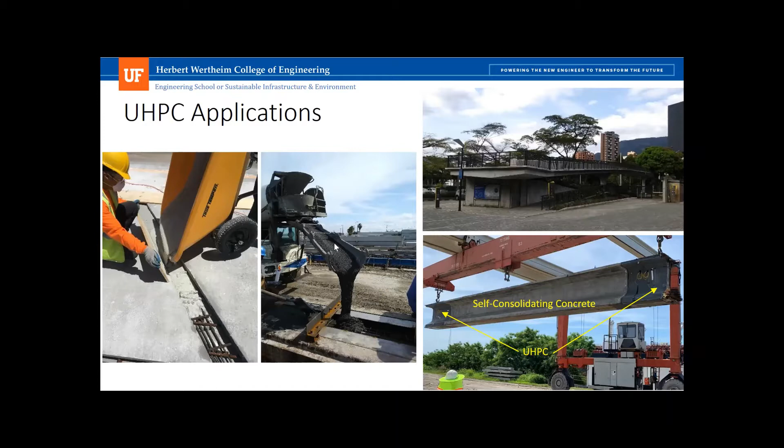So UHPC has a lot of different benefits. You can use it to reduce the amount of steel reinforcement, make your concrete members lighter, and significantly improve the durability of your concrete. This is especially important for environments that have chlorides, like marine environments, bridge decks, or other areas exposed to it. Okay, so we know it has a lot of different benefits and applications.

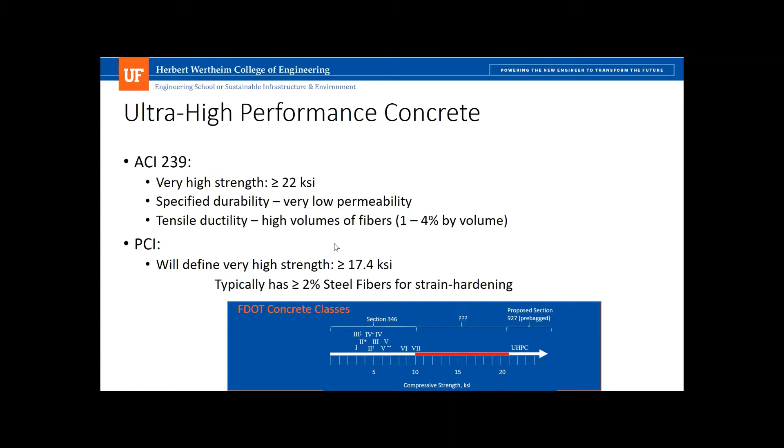You're going to find a different definition for UHPC depending on who you talk to. You'll find some definitions that have it at 150 megapascal, or about 22 KSI compressive strength. Others define it at about 120 megapascal, or about 17.4 KSI. FDOT - right now we're working with the Florida Department of Transportation on looking at where these limits should be. But most of the discussions you hear about compressive strength - how strong can we make it - whereas really the real benefits of UHPC come in the tensile strength and preventing it from cracking, giving you good properties from a structural tensile point of view.

So how do you measure these properties? We're not used to measuring regularly tensile strength for concrete. In most structural designs, we basically ignore it and assume that our reinforcing steel is going to carry the tensile loads. Well, if we're going to take advantage of UHPC and its high tensile properties, we have to be able to measure it properly. So one test that's been developed by the Federal Highway Administration is a direct tension test.

It's based on a 2-inch by 2-inch cross-section sample, 17 inches long, with aluminum plates glued on the side to give it that dog bone sort of effect. And it's pulled with a closed loop displacement controlled machine with an extensometer in the middle. This gives you pretty directly a stress strain curve where you see multi-cracking in good UHPC, and most of the time hopefully you'll see strain hardening behavior and multi-cracking as you see in the pictures in the upper right hand corner where you get these tensile failures.

Okay, so that's one test method. It's expensive. The equipment is not very available currently and definitely not available at most local laboratories.

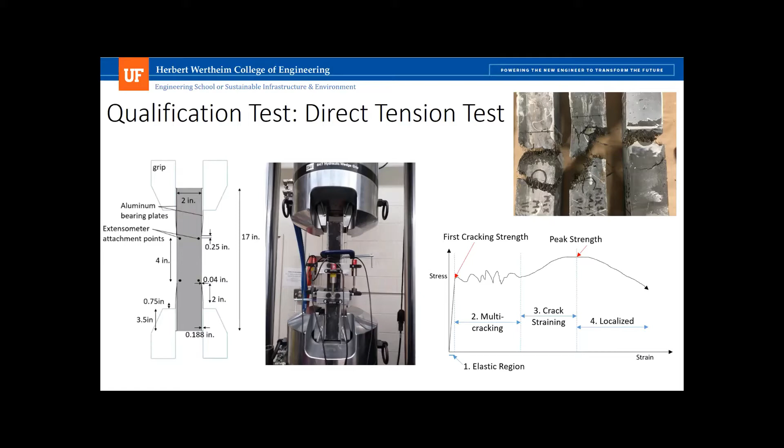Okay, so you get to one of these tests. They work really well for qualifying your material, but both of these require expensive closed loop displacement controlled systems to get good results.

So what do you do for quality control? Many times no tensile testing is done at all. They just rely on the compressive strength testing and rely on the tests that were done during qualification. We assume that it's going to be okay. We assume that the right amount of fibers have been put in, which is a big assumption since at many plants, they're added manually. It's very easy to miss a sack of fibers.

PCI in the design guide that we're working on for UHPC materials is considering requiring 3 beams per day of the flexural testing with an additional 3 beams if you go over 25 cubic yards. This is pretty expensive testing for plants to do on a regular basis. So it's somewhat cost prohibitive to do.

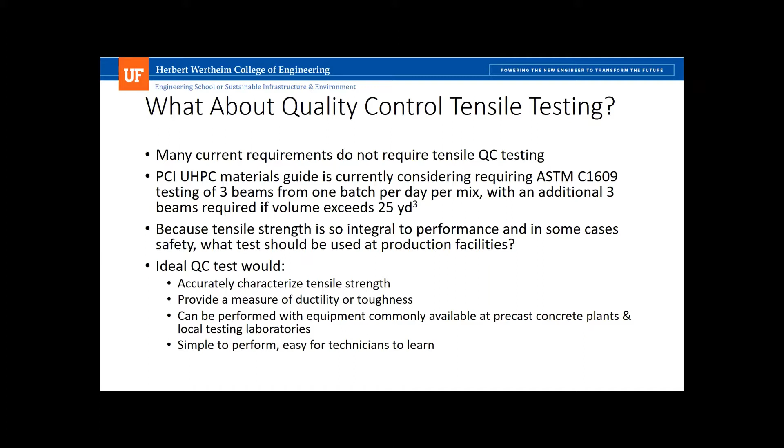Okay, so let's look at a potential test here. It's called the double punch test or Barcelona test. It was originally developed in the 1970s as a test to measure plain concrete tensile properties, but it was adapted recently for ultra high performance concrete or fiber reinforced concrete by a group in Barcelona, Spain.

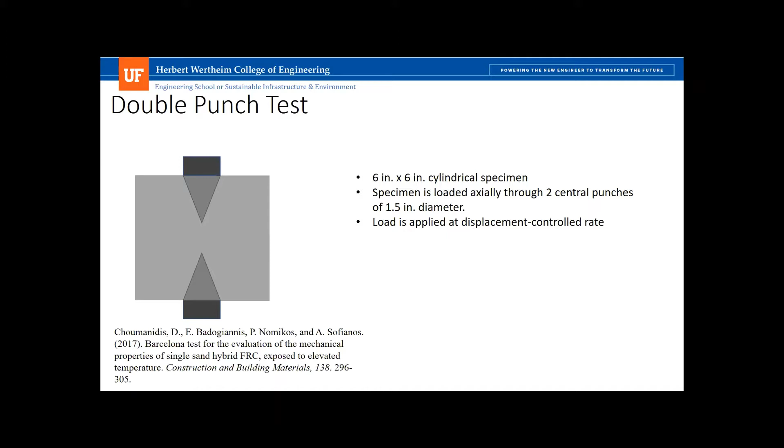In this case, you have a concrete sample where you have two steel punches that you place on top of the sample. When you put it in compression, you get cones of failure that form underneath those punches. As you continue to compress the punches together, they come inwards, and because of the wedging action of those cones, it forces the concrete outwards.

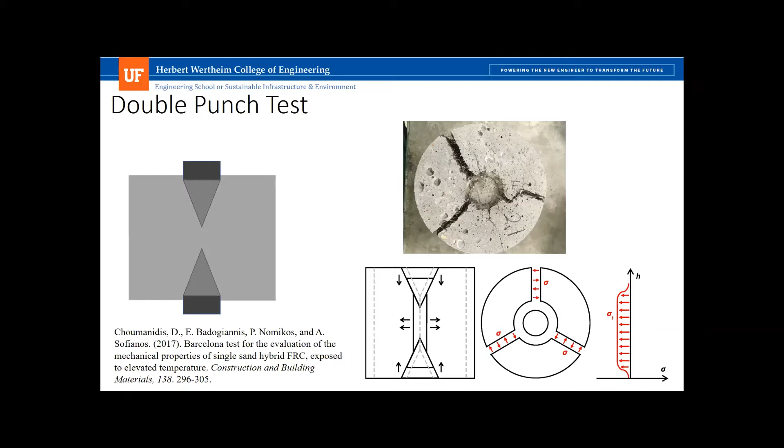When it does this, you get a failure as shown. Since ultra high performance concrete is fiber reinforced, you do get multiple cracks there because you're able to distribute the cracks. That's what you want to see. When you look at diagrams where you try to calculate the stresses, you can get an equation that allows you to calculate the tensile stress based on the load applied to the punches.

Traditionally, the displacement part has been measured using the change in circumference of the sample using an extensometer. It works really well. They have good use and history of use of this in Spain.

There is an ASTM in the works being developed for this test. It's still very complicated. You still need a displacement controlled closed loop machine to do this. The extensometer costs on the order of about $6,000, not to mention the data acquisition to record this. So it's still really out of the realm of capabilities for most precast plants and local testing labs to run. Plus, it's somewhat complicated comparatively because of the data acquisition and logging.

So one of the things that was realized in this testing in Spain was that instead of measuring the circumference, you can get similar information by just measuring the axial displacement of the machine. And so you get a problem in plain concrete, or concrete that's strain softening, where you get basically no displacement measured by the extensometer and the circumference until you get a crack that forms.

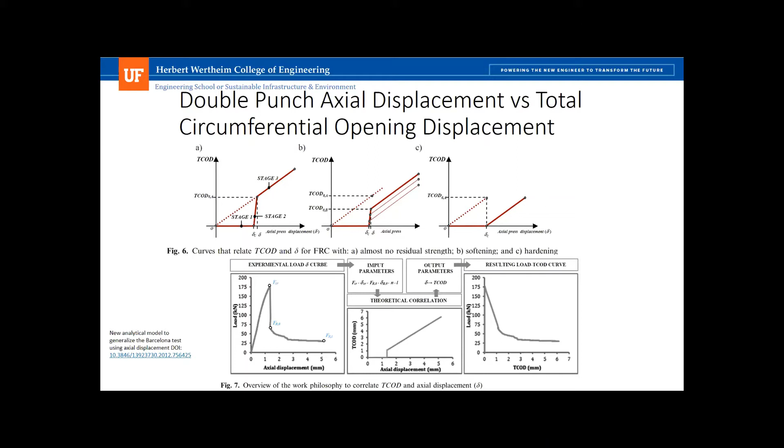Okay, so the next step that we need to overcome is these closed loop machines that are used in the Spanish standard and the draft ASTM standard. So most plants don't have this, they just have a simple compression machine. Now most compression machines are actually displacement controlled machines, they're just not closed loop.

This means that after the peak compressive load, as the load starts to decrease, you get an elastic release of the strains in the walls of the testing machine, which increases the rate of displacement of the sample. Now, this is a big problem if you have a material that cracks and is not ductile. You get a sudden release of energy and a sudden impact loading once a crack forms in non-ductile samples, and this leads to a lot of problems.

The UHPC, however, if it's ductile, you don't get this sudden release of energy and impact loading when you start to get cracking. It gives you a very nice smooth response. At least that's what our hypothesis was.

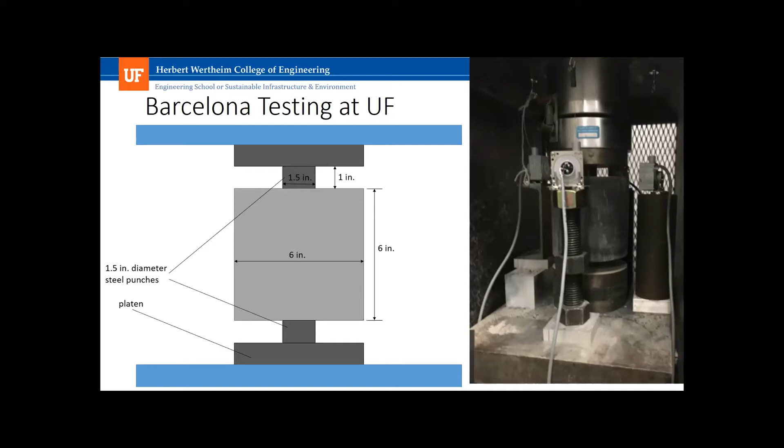So we started testing a program where we used, you can see here, some string potentiometers to measure the axial displacement of our machine and measure the load, and we're able to capture a load axial displacement curve for samples tested in our simple compression machine.

Okay, so we wanted to answer as part of this, can this simplified test be performed in a simple compression machine for QC purposes? Does it work? And is it going to give you reliable results, even though it's not a closed loop?

The next thing we wanted to look at is what are the parameters of the test that you have to control and specify that are going to cause issues. So we wanted to look at finishing process. Do you have to grind these samples flush, or can you just trowel them? That makes a big difference in sample prep for labs. How to cast them, that was an issue we wanted to look at. Punch alignment, if you're off a little bit with the punches, does it make a difference?

And the load rate, especially the load rate, because the load rate on a lot of these machines is a little bit harder to control. You don't get a dialed in exact one millimeter per minute displacement. So we wanted to look at these and then look at how our test results from our simplified double punch test compared to the more complex and expensive direct tension and flexural tests.

Can we use this as a quality control test? Maybe not qualification, that's okay. For qualification, you really have to do that once, and so you can afford to spend more money on that test. But as a quality control everyday test, can it be used?

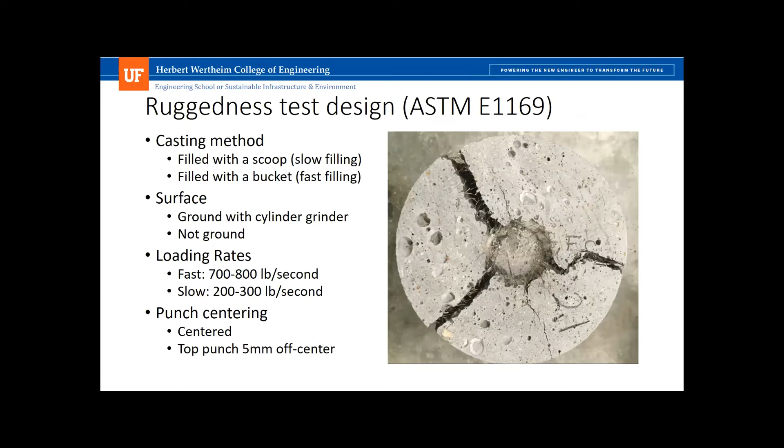So our ruggedness test, we looked at the casting method, filling it with a scoop versus filling it with a bucket very fast. We looked at grinding the samples versus not ground. We did fast versus slow loading rates. You're talking about 2 to 4 times loading rate, and a 5 millimeter off center of your punch. So we controlled all of these variables in a testing matrix specified in ASTM E1169 to see if these factors were statistically significant.

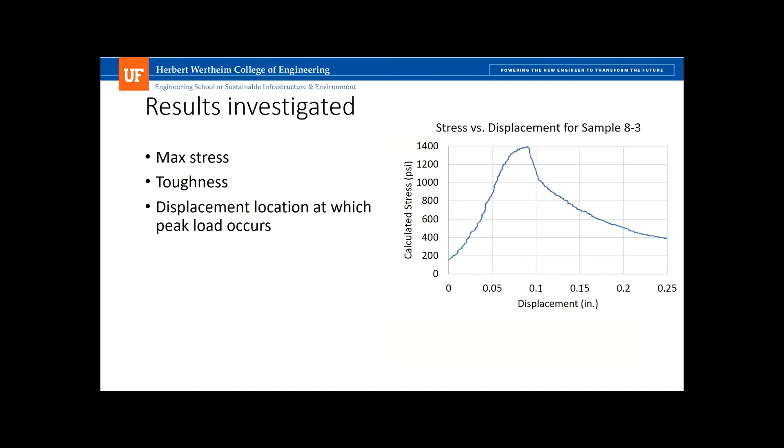And we looked at, with our test, the max stress. We looked at the toughness, or the area under your displacement calculated stress curve, and we looked at the displacement location at which the peak load occurs. So with our ruggedness test, we found that the displacement at peak load was significant if you didn't grind the samples, and that makes sense because you have to locally crush the sample at the surface in order to really dig in and seat the punch.

But it didn't affect the stress or toughness. We found that the scoop versus bucket was very significant. How you make these samples really matters.

If you're filling it with a scoop, you're doing scoop by scoop, basically filling the sample layer by layer. We found that the fibers tend to align in the horizontal direction with thin layers. Each thin layer self-levels out, aligning those fibers in that horizontal direction, and that gives you much higher tensile strength because scooping gives you a preferred orientation, helping to boost your strength. So you need to fill these rather fast, all in one placing from, say, a bucket.

The load rate didn't matter, even that big of a load rate. We see a lot of talk about how the displacement rate needs to be controlled precisely. We found it was not statistically significant in this test, and that's because of the ductility of the sample. A lot of those issues matter less when you have a ductile sample. You're not getting impact loads, and that elastic release isn't affecting as much.

And the centering was not statistically significant either. Centering is actually pretty easy to control. You can use templates to help you get it centered right.

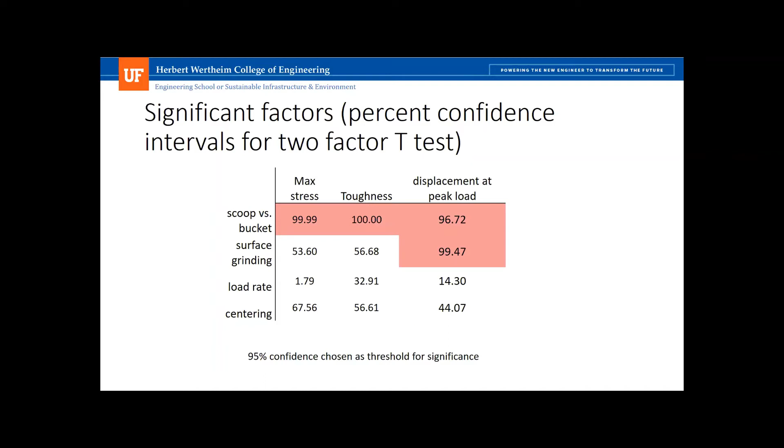Most of these labs don't have the ability to collect string potentiometer data, just like they don't have the ability to collect extensometer data. So numerically, we looked at our continuous data and selected points off of it. Say you take these readings manually - you have a dial gauge that you read off of to read the load and displacement.

If you were to select these points manually and build your curve at that point, say every 0.025 inch of displacement, how does that affect the toughness results you're getting? The peak strength you can get because the machines typically have a method of giving you the peak results independent of you keeping track during the test. So that's not a problem.

But the area, we were concerned that would matter if you simplified it further. We found that as long as you're taking results about every 0.025 inches, it only made a deviation of 1.5% from taking continuous measurements. Very little difference, and it gives us confidence that you can take these results manually, writing them down.

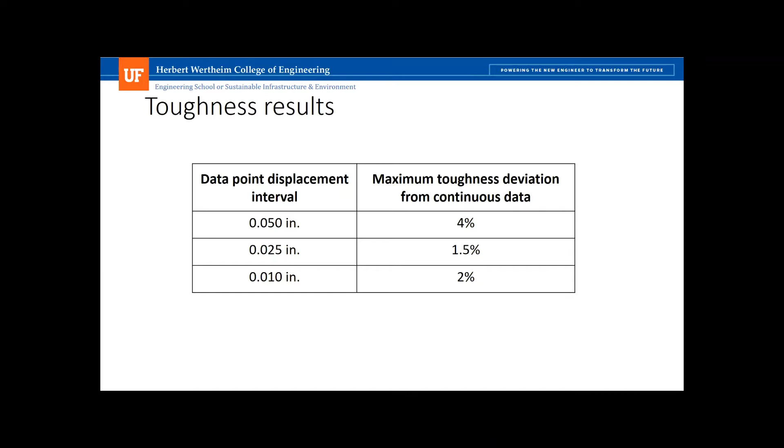In fact, we've taught undergraduates in our laboratory how to take these. It's similar to how elastic modulus tests are performed manually - you write down the load and the strain value in the compressometer when it's written. Well, in this case, you write the load down.

For us, this means you have your punches, you write the load down, and then you have a displacement gauge. You can buy these pretty cheap at the hardware store - at most, even a fancy one's a couple hundred dollars. So plants can run this in their compression machine without any real issues.

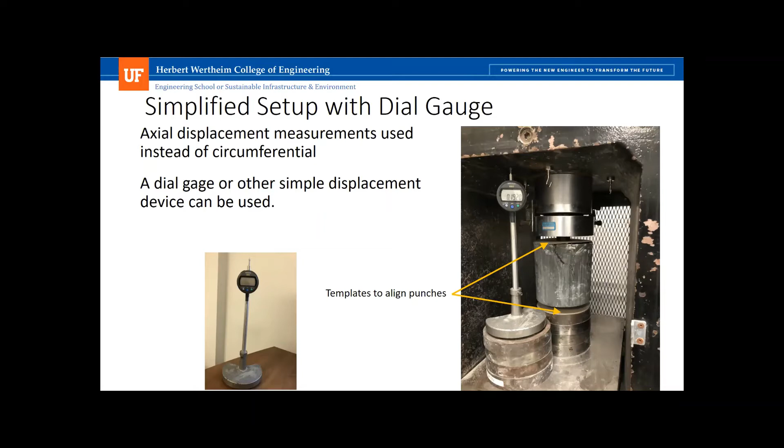So we looked at different fiber percentages for ultra high performance concrete to see how they affected the results in this double punch test. We found that with two different types of fibers, you get very different results if you just look at the stress, basically the strength or maximum strength of your material.

Part of this is because you can get a very high failure strength just from the first cracking load, basically the strength of your cementitious paste system, even without the fibers. You can get a very high load, but then it cracks and you get no residual strength after that. That's why you really need a measure of toughness or ductility.

So with our fibers that were not giving us a ductile response, the double punch test was able to nicely pick that up, and it picked up the toughness with our straight fibers pretty well.

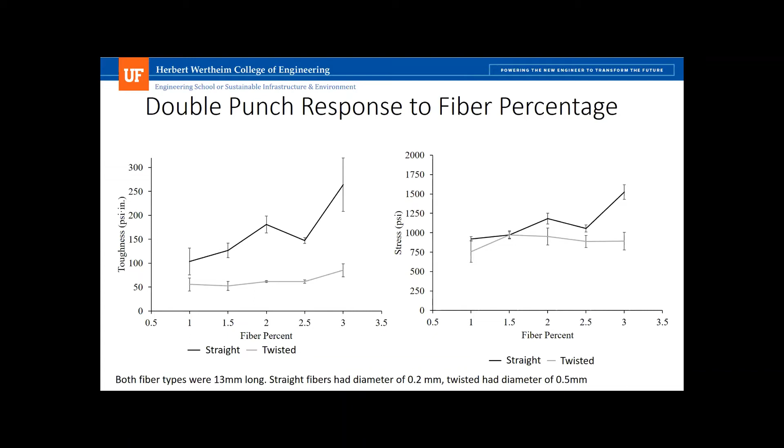So if we compare the results of our double punch test to our direct tension results and our flexural test to see how it performs, we find very nice correlations between the direct tensile strength in double punch and our direct tensile results. We get the same with our direct tension versus our flexural - you get nice correlations no matter which test method you use.

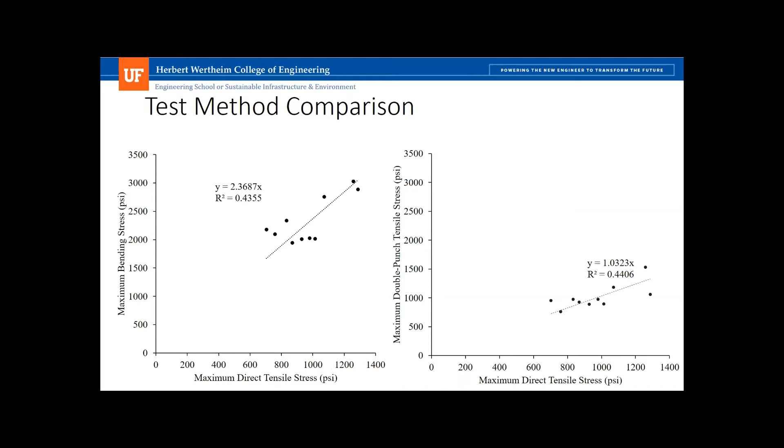You just have to be careful that with the flexural test, you're really getting a modulus of rupture, not a true tensile strength, just using that simple equation.

So something to be aware of: we find that when we compare the flexural modulus of rupture with the double punch test tensile strength, you get very nice correlations. Again, you just have to be aware of that increase because of the flexural modulus of rupture.

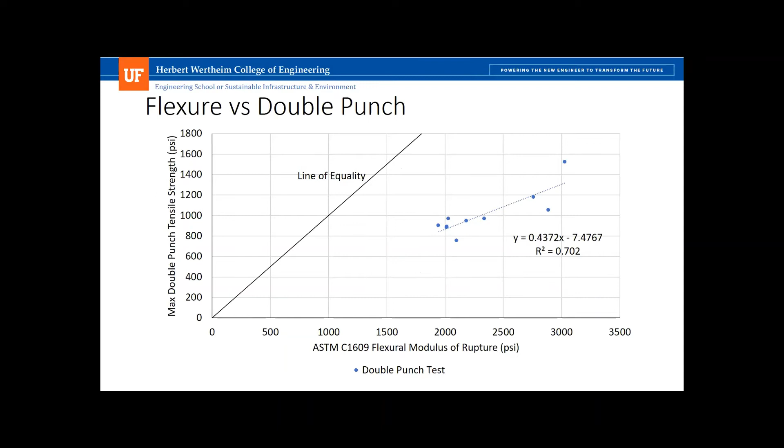When we look at direct tension ductility parameters, comparing the tensile stress at 0.05 strain or the direct tensile toughness, we again get excellent correlations. These are on the same order of R-squared values as when you compare direct tension toughness to the flexural toughness result. Very good, nice results.

So if we look at a summary of our tests, the first thing we can say is you really have to have a measure of toughness and ductility for UHPC for it to be valuable. Otherwise, you're just measuring the first cracking load a lot of times, or you could get it accidentally.

So for our ideal QC test, looking at our parameters, we find that we can accurately characterize the tensile strength with our materials. We've got very nice correlations with the direct tension strength, and it gave us a very nice correlation with more expensive measures of ductility and toughness. You can do it with commonly available equipment at precast plants, and it's pretty easy — we're having undergraduates perform it at our lab.

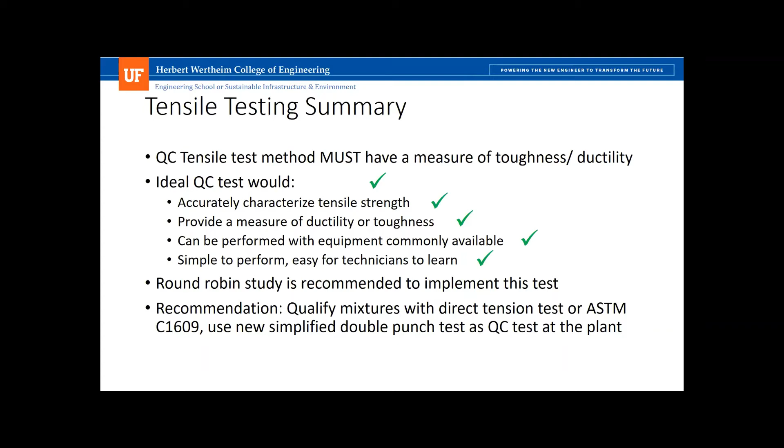We would recommend that a round robin study be done, just to get the precision and bias. But we feel that this test method could be used as a quality control test at the plant. With that, I'd like to acknowledge FDOT for their support, advice, and help.

With that, I'll take any questions that you have.

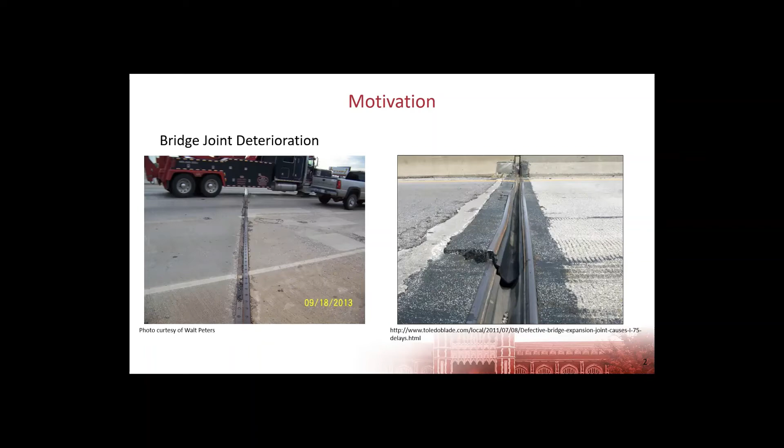Not only is fixing those joints necessary, but as they're damaged, they're letting chloride-permeated water go onto our girder ends within the bridge, and it's causing a lot of damage and corrosion within our precast girder end regions, where we have our major location of pre-stress transfer and high shear forces. We've seen in testing of full-size girders with this type of corrosion damage that we can even get deterioration of the bearing regions under service load levels. So this can cause some serious issues in terms of the life of our bridges over time.

So there are a lot of ways we could eliminate these problems. One is to reduce the number of deck joints to begin with. In a number of bridges in Oklahoma, this was done by creating continuous spans between precast members with individual continuity connection blocks. The ends of the girders would be connected using extended pre-stressing strands from the end of each girder, some mild steel rebar in some cases, and then a concrete block cast to connect the ends of those two girders, making them continuous for live load.

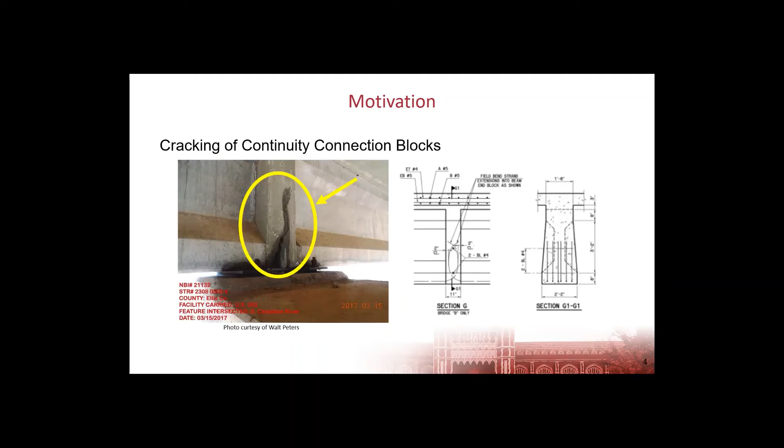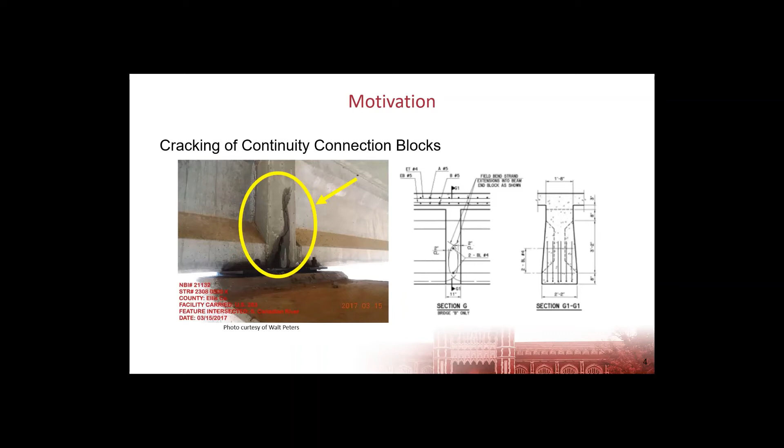This has led to a lot of issues in Oklahoma because almost every one of these bridges has cracks through those continuity connections, caused by restrained shrinkage and creep as the bridge beams experience losses over time. Looking at these two issues, we thought UHPC has great potential for repair and rehabilitation of girder end regions that have been damaged, as well as these cracked continuity connections.

UHPC is a great material with a lot of potential for different things. It's characterized by its high compressive strength—using a more general definition, between about 18,000 and 30,000 psi is typical for UHPC—and also has that great post-cracking tensile strength discussed in the previous presentation. It's very flowable and able to get into complex shapes, which is wonderful for repairs and rehabilitation, as we'll discuss later.

It also has very low to negligible permeability, high freeze-thaw resistance, and just overall great durability, which can help us repair damaged regions and encapsulate them to prevent further damage in the future.

In terms of what has been done in the past relative to UHPC repair and rehabilitation, within Oklahoma we've done some study on expansion joint headers and actually done some field implementation using UHPC to repair around the expansion joints, which was kind of the motivation of this project.

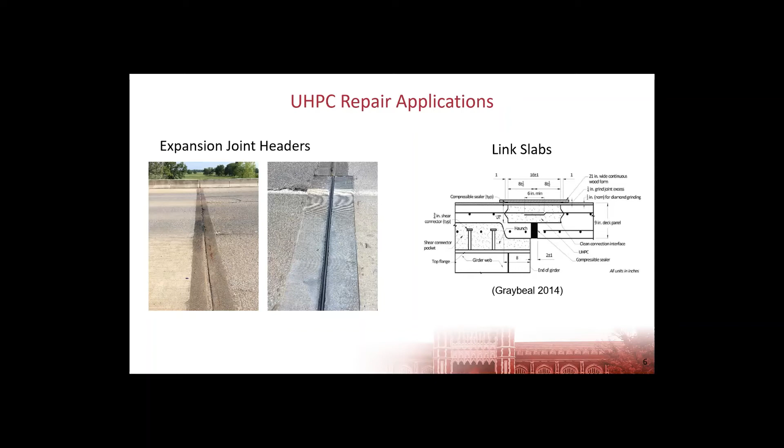In other states, there's been a lot of work done with UHPC link slabs, used both in new construction and even removing some of those joints in the deck and spreading them out to the end of the bridge. Previous research has been done on repairing steel girder ends with UHPC.

This is kind of an encapsulation with shear studs on the girder web to strengthen the end of a corrosion-damaged steel girder. Some recent work has looked at using UHPC as a patch repair on the ends of pre-stressed or precast pre-stressed concrete girders.

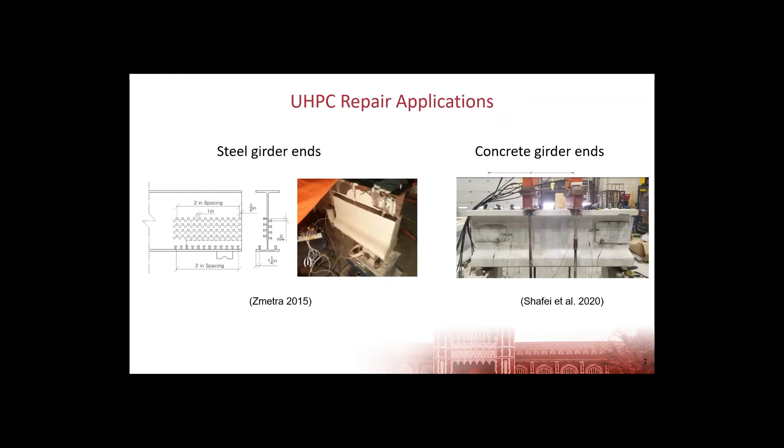This webinar is primarily focused on UHPC, and that's the main point of a lot of the work we've been doing. But in fairness to the rest of the project, we've also been considering other innovative concrete materials, such as fiber reinforced self-consolidating concrete.

This is a very flowable concrete that compacts under its own weight. It's also easy to cast, can be cast into complex geometry and congested reinforcement without the need for vibration, and includes fiber reinforcement and an expansive agent to reduce and prevent any detrimental effects from differential shrinkage between the repair and the original material.

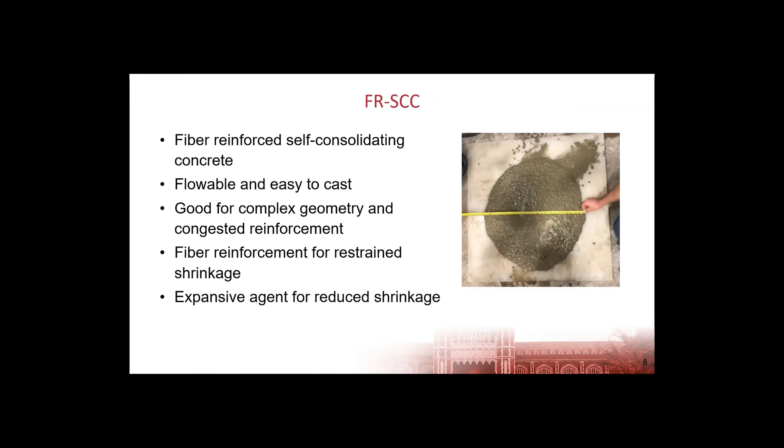This material has been used in some different applications, such as retaining walls in Montreal, some bridge piers in the US, and work done here at OU related to bridge girders—taking a full-size AASHTO Type 2 girder that had been taken out of a bridge and tested to complete failure in flexure and shear at each end.

We were able to restore about 80% of the capacity with that fiber reinforced self-consolidating concrete at one end using post-tensioning to restore the pre-stress, and at the other end without post-tensioning, still getting around 80% of the original capacity.

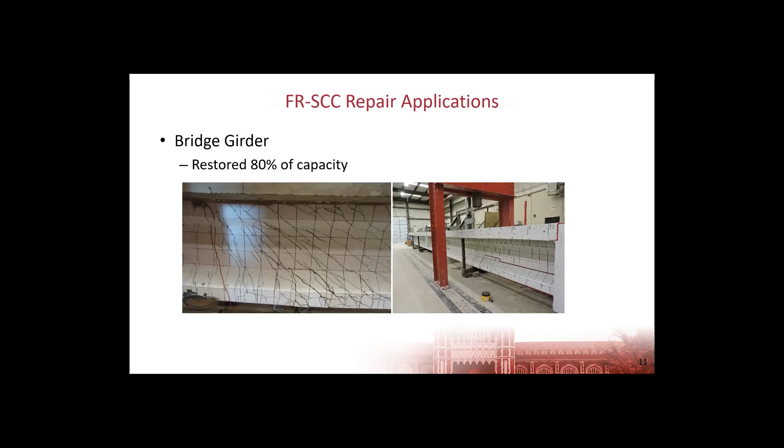The other material we were considering in this research is magnesium alumino liquid phosphate, or MALP concrete, which is a two-part system with a magnesium alumina aggregate dry powder and a mono aluminum liquid phosphate activator that are mixed together.

It's very rapid setting, with very rapid strength gain. It's great for low temperatures because it will still set and gain strength rapidly even when it's very cold. It also chemically bonds with both the base concrete and with itself, giving a very nice interface bond between the two materials. It has potential to reduce the halo effect in terms of corrosion in the base concrete, and has been used successfully in a number of states for repair applications, including now Oklahoma.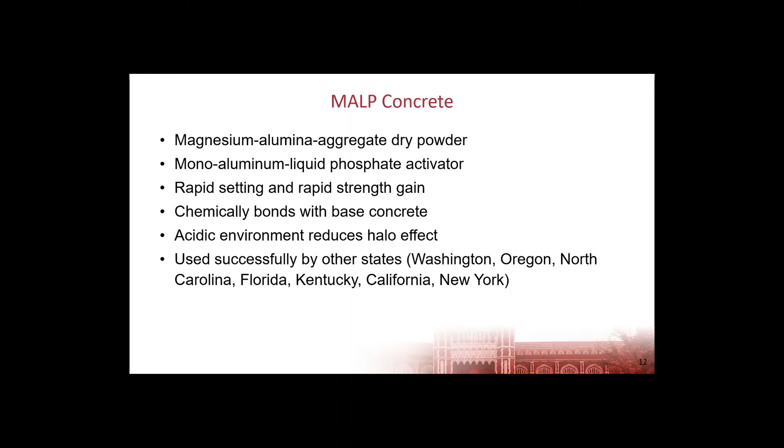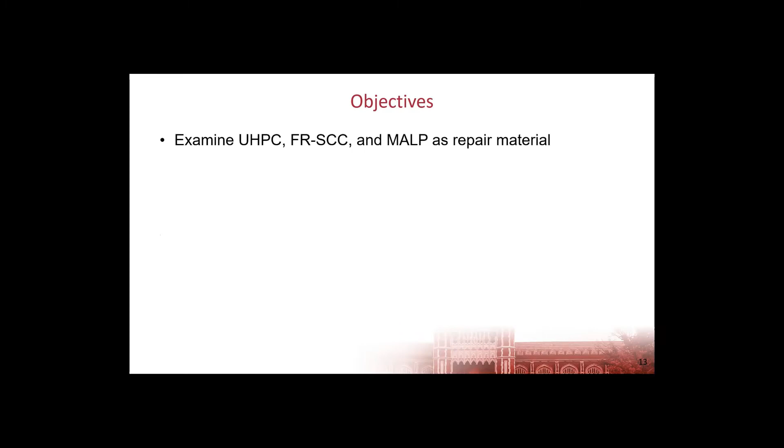The objectives of our overall project were to examine UHPC, FR-SCC, and MALP concrete as a repair material for girder end regions with induced shear damage, which is what I'll talk about most in this presentation, as well as girder end regions with simulated corrosion damage, which is somewhat still ongoing within this project. We also looked at repair and replacement of continuity connections using these materials, and finally the effectiveness of using UHPC as a continuity connection replacement in a full-scale in-service bridge.

For the end region repair, we used an approximately half-scale pre-stressed concrete girder specimen with two half-inch special pre-stressing strands. It had a composite deck section designed to simulate a half-scale bridge deck, but we increased the depth and shortened the width so we could get the same flexural capacity with a smaller overall section. It included shear reinforcement designed to produce a flexural failure at mid-span.

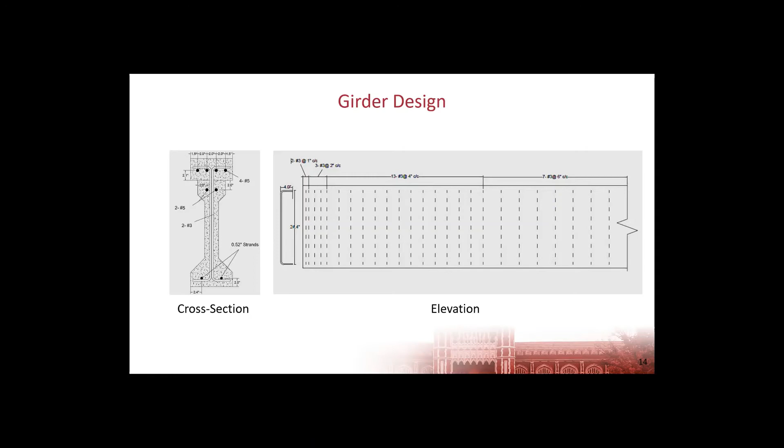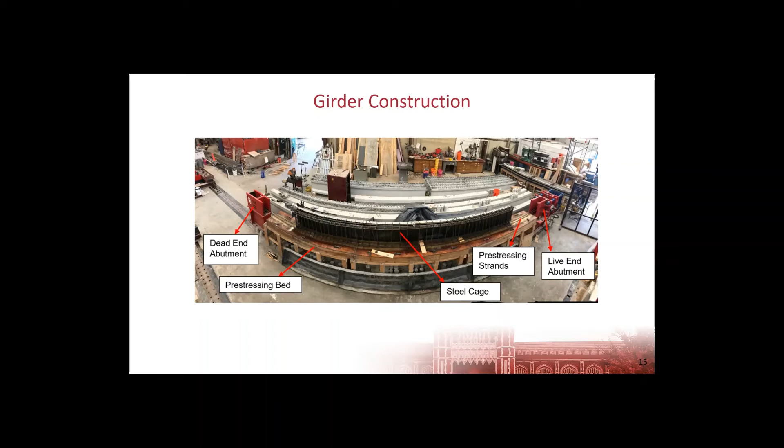We cast these specimens at Fears Lab on the OU campus, one at a time because of pandemic restrictions and other projects getting behind, so we didn't have as much space as normal to pre-stress two or three at once. Either way, we'd put together the reinforcement cage and formwork, run the strands through, pre-tension them with our pre-stressing abutments, cast the specimens using a self-consolidating concrete mixture that would gain about 4,000 PSI strength in one day, release the pre-stress, and then 28 days later cast the decks on top of the beams.

Once the specimens were constructed, we tested them to failure in shear and then repaired them using three different repair materials.

The FR-SCC we used was developed through previous research at OU. Former student Corey Wirkman did the initial work back in 2016, building on work by my colleague Dr. Jeff Volz from Missouri S&T originally. The mixture is a Portland cement concrete with fly ash and type K expansive cement as the shrinkage-compensating component. It used 3/8 inch river rock along with fine aggregate, polypropylene fibers, entrained air, and enough high range water reducer to get the flowability we wanted, in the range of about a 28 inch slump flow. We also included citric acid in the mix to control the set, because the expansive cement leads to an earlier set time than pure Portland cement concrete.

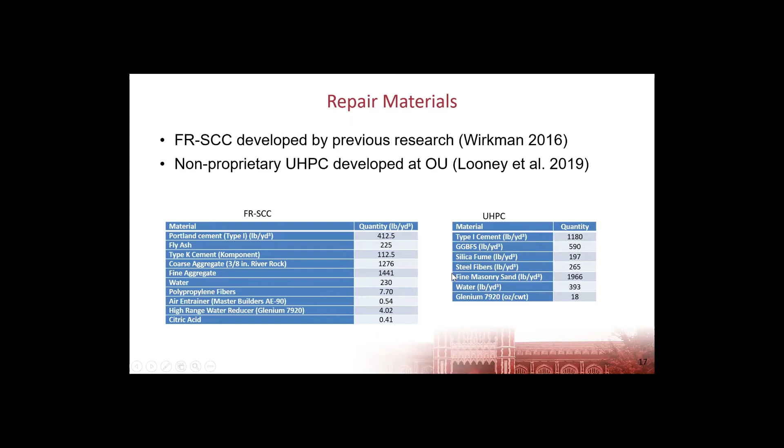The UHPC we used in this project was a non-proprietary mixture developed here at OU by former students, published in 2019. It includes a Portland cement mix with a 30% replacement with slag cement and 10% replacement with silica fume. We used 1/2 inch steel fibers at 2% by volume, and again high range water reducer sufficient to get about an 8 inch slump flow.

The MALP product we used was a proprietary product marketed by a company called Phoscrete. We used the same materials throughout for each aspect of this research, whether looking at shear induced damage, corrosion induced damage, or damage to those continuity connections.

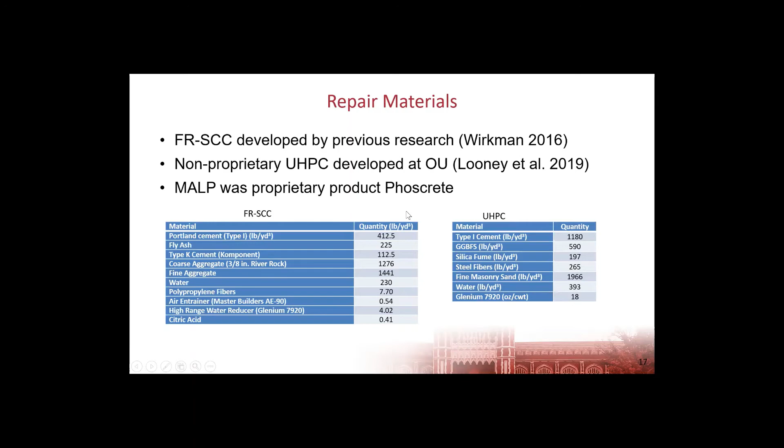Specifically for the end region repair for shear damage, or shear strengthening, we did an initial load test to induce a bond shear failure, close to the end region where it could potentially be affected by corrosion. We loaded to failure, with our failure criteria based on maximum deflection as well as anticipated load. Afterward, we mapped all the shear cracks so we could compare to the post-repair load test.

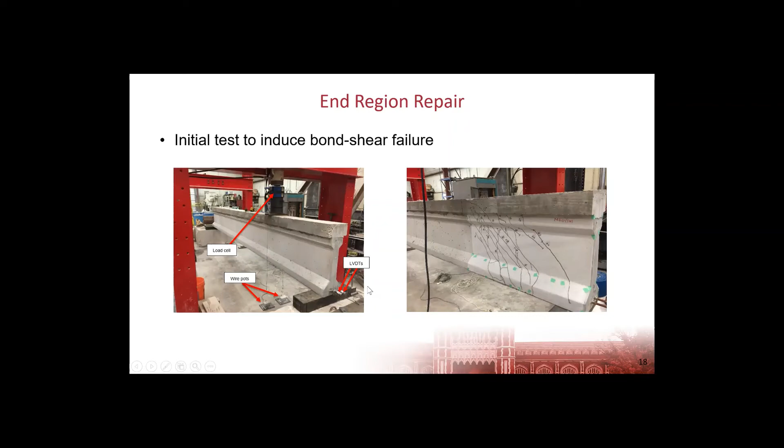Once we had our induced damage, we encapsulated the end region using either the UHPC, FR-SCC, or MALP concrete. We roughened the surface using a grinding wheel, trying to simulate what could be done in the field. For shear studs, we used concrete screw anchors, basically Tapcon concrete screws, designed in a pattern that would span the entire repair area but be offset on either side so we didn't have two screws at one point on the web.

And then we designed the number of screws that were needed by looking at a strut and tie model of the end region and the compression force that we would need to carry to get the full shear capacity.

You can see on the right our repair sections. For the UHPC, we used a minimum thickness of 1.5 inches on the bottom flange. We had 2 inches below the beam, and then we used a constant cross section all the way up. So we had a 4.5 inch thickness on the web, and then a 3 inch thickness on the top flange of the beam, and we went to the bottom of our simulated deck.

For the FR-SCC and the MALP concrete, which had a lower strength - the UHPC is about an 18,000 PSI material, the FR-SCC is about 6,000 PSI, and the MALP concrete is about 12,000 PSI. So for those two lower strength materials, we increased the thickness of that section out to 3 inches on the bottom flange, and again, constant rectangular section.

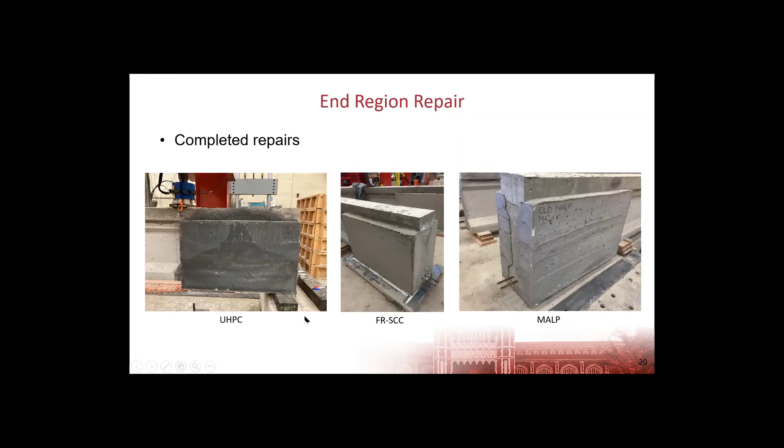We then completed post-repair load tests using the same configuration that we did pre-repair, which was a single point load about 4.5 feet from the end of the beam. And these pictures are all post-testing, so you can see the cracking patterns in each one of them.

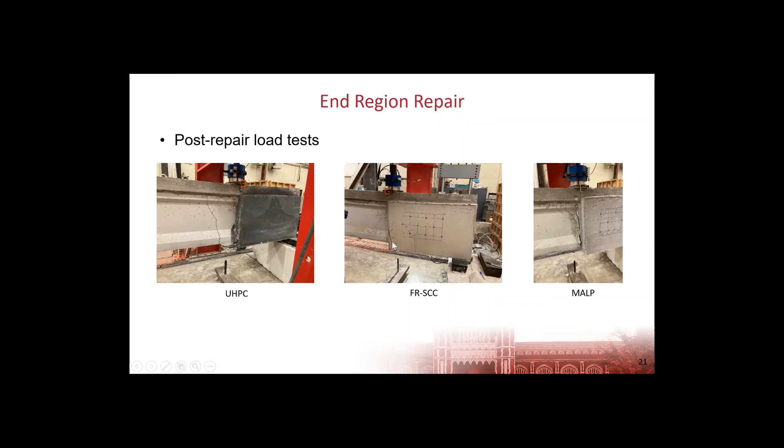You can also see that there's not a lot of cracking that was observed. You have to remember that there is cracking underneath the repair that was already there. But in each case, we primarily saw new cracks outside of the repair. In all cases, those cracks actually extended past the load point in terms of shear cracks, which was a little bit unexpected. For the FR-SCC and the MALP concrete, we did see a crack right at the interface between the repair and the beam. And then, for all three repairs, we saw very little cracking actually in the repair material. We saw just a few cracks in the UHPC and FR-SCC repairs. We didn't see any in the MALP concrete for either specimen we tested.

In each case, we can see that we have an increased stiffness because, of course, we're adding cross-section to that repair. And in all cases, we had an increase in ultimate load and a shift to more of flexural behavior for the beams after we repaired them.

If we look at the post-repair load test for all the specimens, we see very similar behavior early on - so very similar stiffness at the beginning of loading - and then the FR-SCC and the MALP concrete are very similar, where the UHPC gave us the highest load after repair.

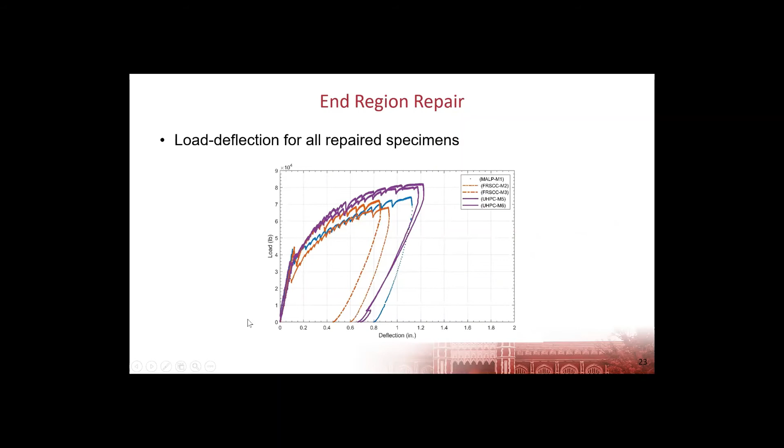If we look just at maximum loads, for all specimens, we increased capacity by about 40% compared to the original non-strengthened case where we had that bond shear type failure.

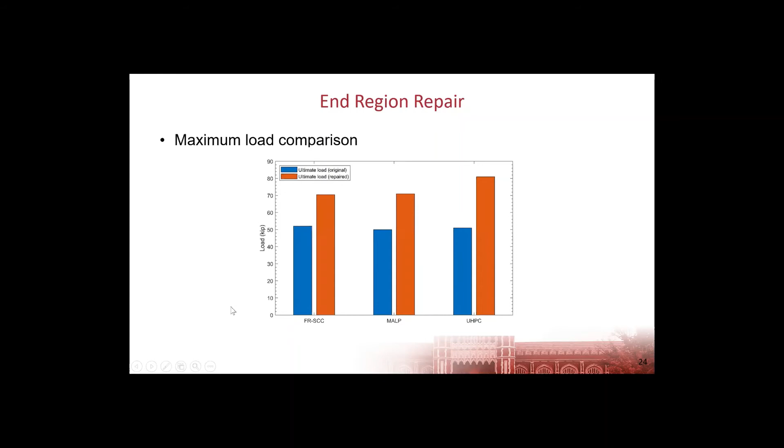All right, so I'm going to spend just a few minutes talking about a different aspect of this project where we actually did a field implementation replacing in-service continuity connections with UHPC. This was on a 5-span bridge in western Oklahoma. The middle 3 spans were continuous. They're about 80-foot spans in each case.

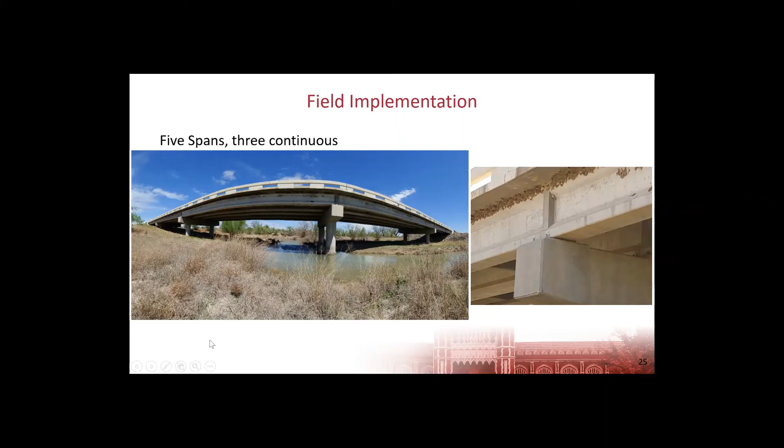Those 3 spans were connected using individual continuity connections. Every one of them had cracks indicative of the effects of restrained creep and shrinkage within the beams. Initially, we did a load test of the bridge before we repaired it to get a feel for the initial condition and level of continuity present.

We measured deflection on span 4, the continuous span closest to the north side, using laser distance measurements and plumb bobs. We loaded it with 2 fully loaded dump trucks because the spans were pretty short. If we put a larger truck on there, we wouldn't get the kind of deflection effects we were looking for.

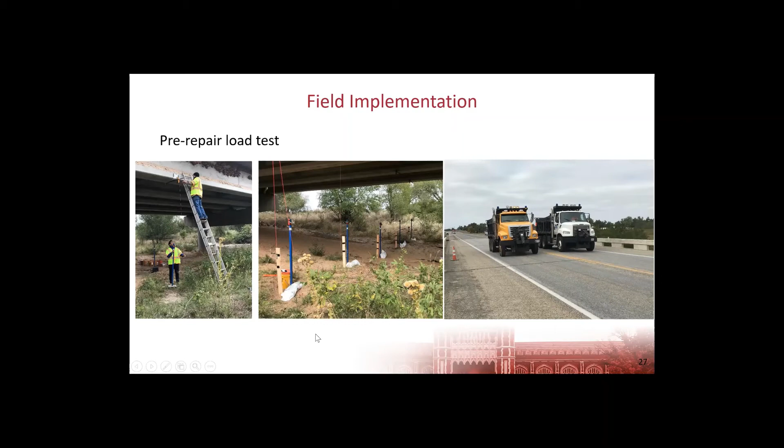Then the joints were demoed by the contractor doing the rehabilitation on this bridge. We installed strain gauges in an exterior joint and an interior joint between spans 3 and 4 so we could look at deformations after repair that we couldn't look at in the pre-repair load test.

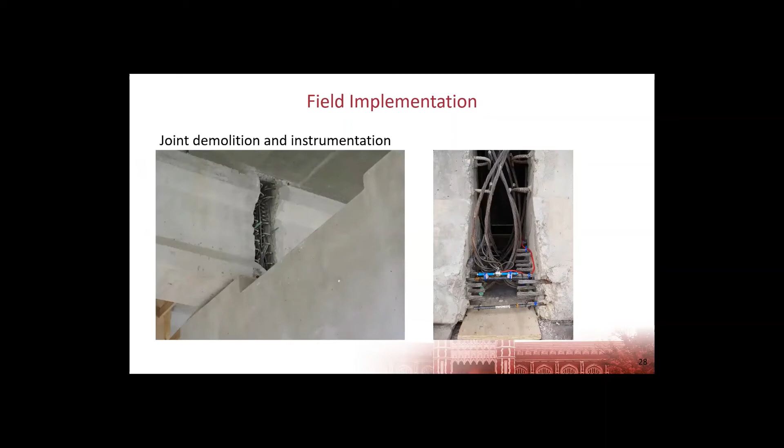Then the joints were constructed using the proprietary UHPC Ductal material. It was placed through a 2.5-inch hole in the deck into each of those joints, so it had about a 5-foot free fall into each joint. It was a little difficult to place through the hole, and I'll tell you more about that in a second, but we produced a very nice replacement joint using that UHPC.

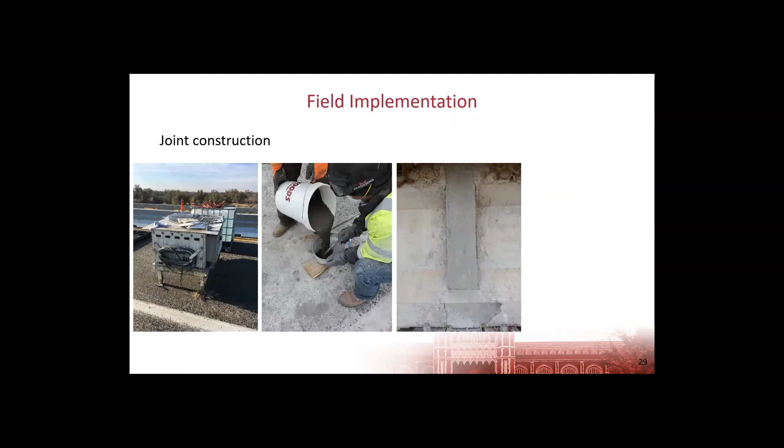You can see it from a couple of different angles. We monitored those joints for about a year. After that year, they looked as good as they did the day they were cast. We didn't see any signs of distress around those joints.

Here on the right, you can see at the top of one of those joints there is some airspace, which we think is a result of air escaping, causing some settlement after casting, just because we only had the one fill hole that was fairly small and the air didn't have any way to escape quickly.

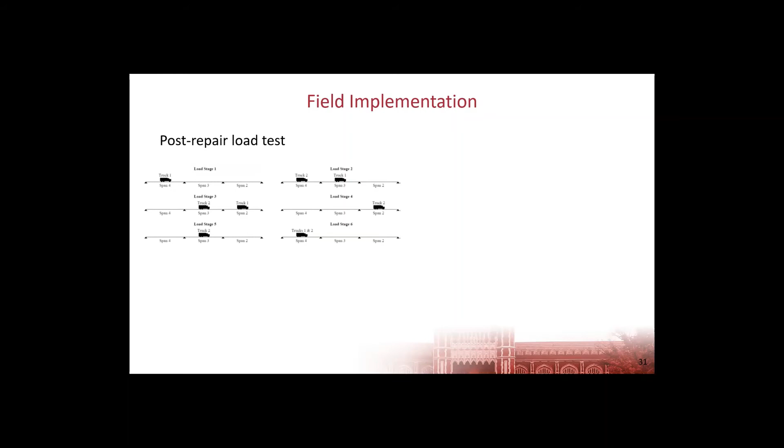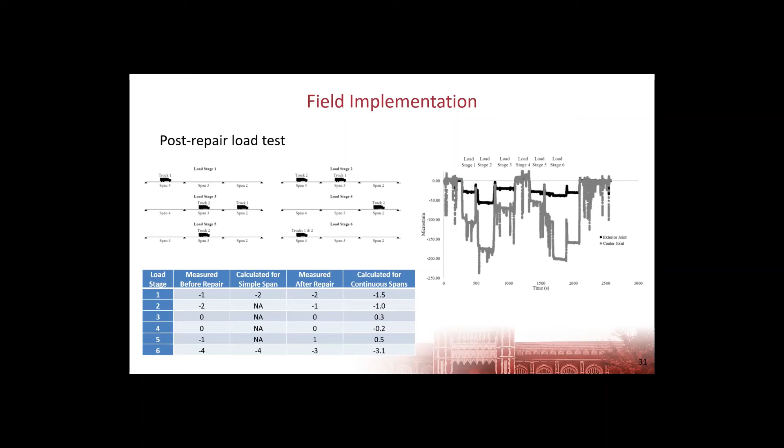Quickly looking at the post-repair load tests, we used 6 different loading stages to characterize all the different possibilities for continuous behavior. If we look at both measured before and after, as well as calculated for assumed simple spans before and continuous spans after, we see all the signs that we're getting the continuous type behavior that we anticipate.

In conclusion, all 3 repair materials we used provided an increased capacity when used to encapsulate a shear damaged end region, with UHPC providing the greatest increase in capacity, even though it had the smallest repair thickness. Those specimens exhibited less cracking than the initial beams, which could lead to improved longevity if we encapsulate the ends of some of these beams that have damage.

Finally, we successfully used UHPC to replace some existing precast concrete girder continuity connections that appears to be functioning as expected. We still have some work to do that's ongoing, but I'll end here since I think I'm a little over time, and say thanks to all those that sponsored our work and worked with us on this project.

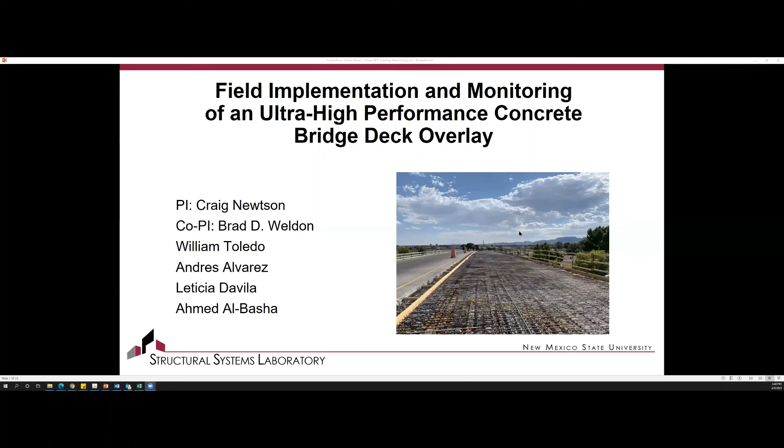So we're looking at using local materials for us. Just a little bit of background into this project.

We've been working with the New Mexico Department of Transportation for quite some time to develop UHPC with local materials. As a starting off point, we had some material that we developed and we adjusted those mixture proportions for the application of overlays. That was our starting point for this project.

I'll give you a little bit of background as we go through this on some of the laboratory tests that we've conducted as we started the overlay project. Then we'll talk about some of the field implementation, what's going on with the project right now, just a brief summary of everything as we go.

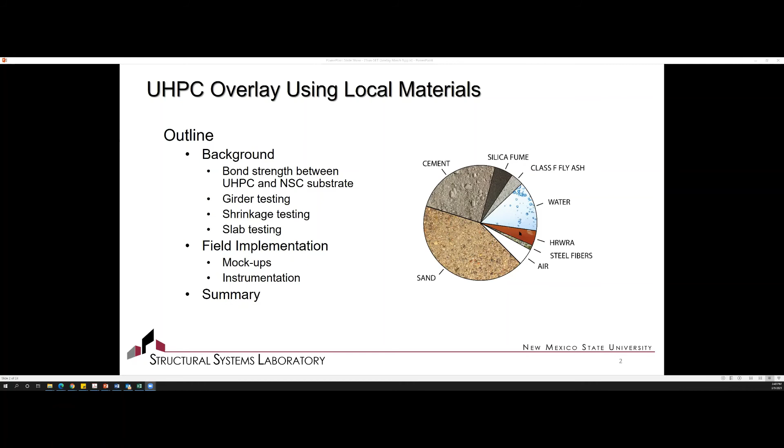The objective of this overall project was to assess the potential of using this locally developed UHPC as an overlay material. We did this by first starting with our laboratory studies, where we did a lot of different studies. Now we're implementing it into the field, and as the project continues, we'll be monitoring the behavior of that overlay.

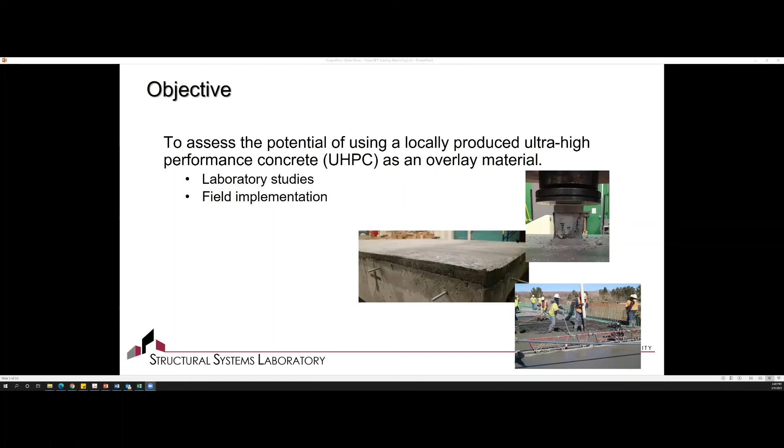Starting with the laboratory studies, we went through a lot of different tests to get to the point where we felt comfortable implementing it in the field. And we started with looking at bond.

We did several different bond tests to verify our behavior there. We looked at slant shear tests, splitting tensile, and direct tension tests. What we found was that the performance of the UHPC bonded very well to the substrate surface conditions.

We also looked at a lot of different surface textures, how those different textures affected the behavior. We found that really with minimal surface preparation, we got really pretty good levels of bond.

After some tests, we then put this UHPC on a girder that we had in the laboratory. We actually put a 1-inch overlay on this girder you can see here. Then we subjected this girder to 1,200 load unload cycles at what we expected to be greater than expected service load conditions, meaning we displaced it much larger than what we'd expect to see under truck loading.

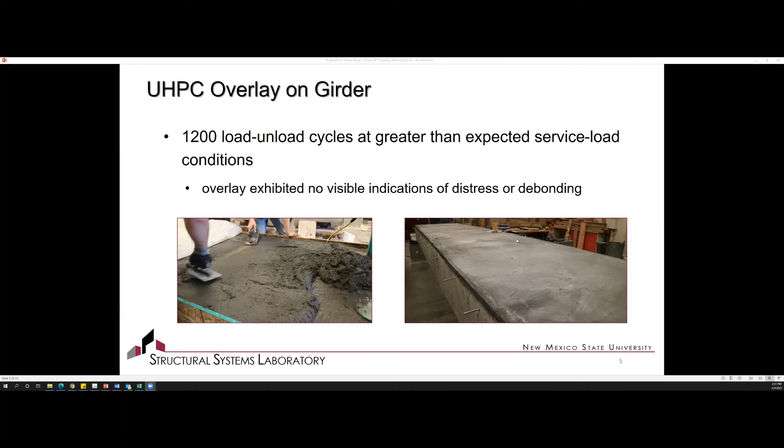After those 1,200 load unload cycles, the overlay exhibited no visible indications of distress or any debonding issues on the girder. We then took the girder to failure, and even after we took the girder to failure, we really didn't see any significant signs of distress. We did have a few isolated debonding locations, but that was after the girder failed. So we felt comfortable that we were able to get the bond that we were wanting.

We also looked at shrinkage, so we looked at early age shrinkage, and we did this because as the shrinkage occurs, we know this is going to develop stresses between the substrate and the overlay. So we wanted to make sure that we could accommodate that.

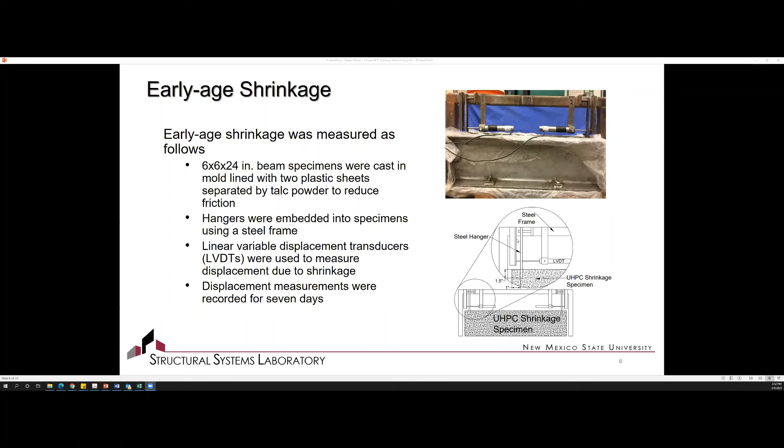We had an idea of what we'd expect in the field, so we looked at early age shrinkage by looking at small prisms. We were monitoring the strain that was being developed over the first 7 days for the early age shrinkage. You can see the test setup there. That enabled us to monitor and capture those deformations in the UHPC specimens.

We also looked at a little bit longer term shrinkage. Again looking at prisms, we took length measurements for up to 28 days after demolding, so we have a little bit of idea of what goes on in the longer term as well.

We also wanted to double check and look into the temperature and shrinkage effects, or the combined effects of these, so we conducted some slab tests. These slabs were 3 feet by 3 feet, and they varied in different thicknesses, from 4 inch up to 6 inches, also with very different reinforcement ratios. We looked at the various reinforcement ratios and how this affected the behavior.

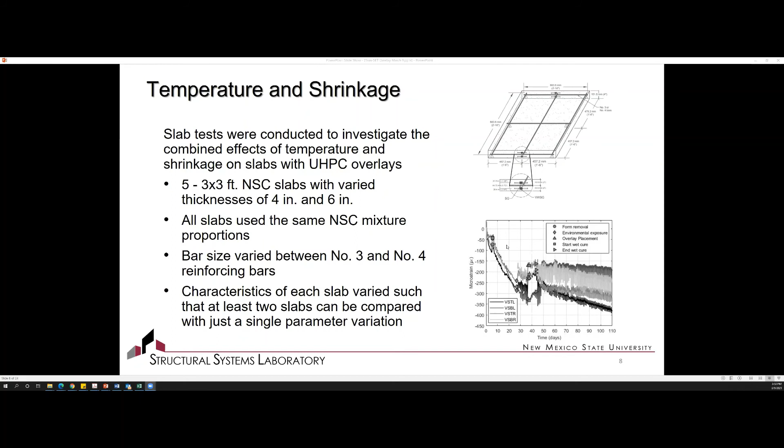We were able to capture the behavior of that, look at what stresses were being developed at that interface, and characterize what we'd expect under both the temperature and shrinkage conditions as they were exposed to the environmental conditions.

Based off of all of this laboratory testing, we identified that we had adequate bond strength. We saw this with all of our different testing on both the small specimens as well as the girder test. With the early age shrinkage test, we showed that the majority of that occurred in the plastic state, so we didn't expect this to contribute to the bond stress too significantly at early ages since it was pretty young concrete.

We monitored the temperature and shrinkage slabs for over a year, and we had no issues with debonding observed during that time. At this point, we felt comfortable to move to field implementation, working with the New Mexico Department of Transportation.

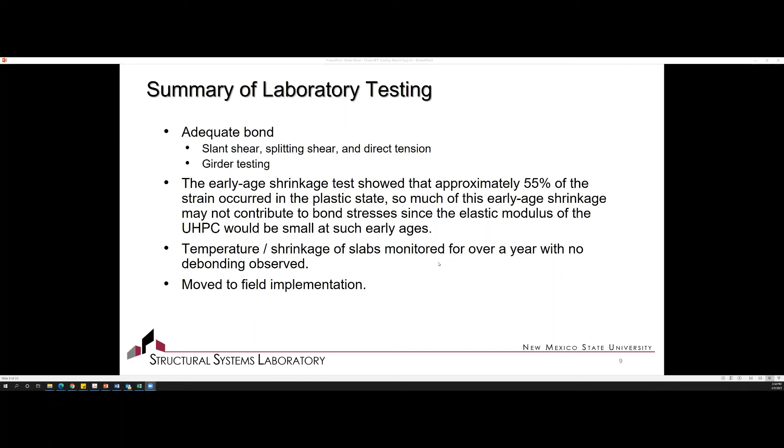The plan was to put the overlay on this bridge, and in doing so, they were also going to replace portions of the deck. So this isn't quite the traditional method of just applying the overlay on the deck—they were doing additional work as well.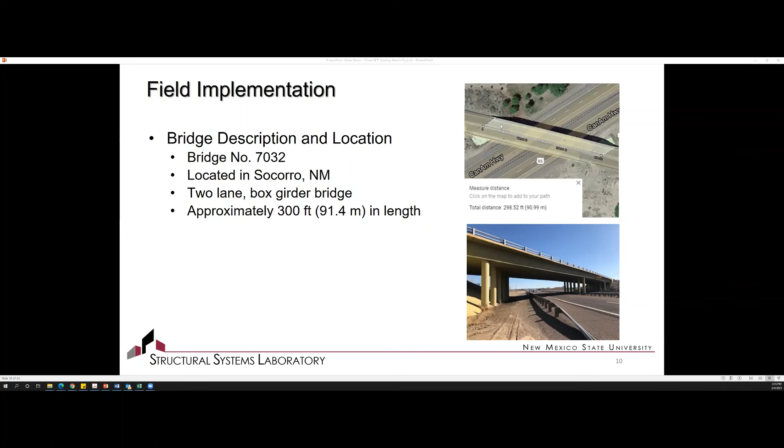As we began this field implementation, as part of the requirements for the contractor, we had to do a mock-up. We were there to look at quality control, surface roughness, and surface preparations. We did some bond tests with this, really just to address any challenges we had.

One of the biggest challenges came really early on when we had to change the fibers, as many of you might be aware, the fibers produced in the United States changed, so we had to go to a different fiber and make some modifications there. I'll address that a bit more in a few later slides.

Initially we started out working with the contractors doing one mock-up slab, and these slabs were 20 feet by 20 feet. The HPD concrete slab, the deck that was going to be placed, was unreinforced, and field cured for a minimum of 8 days prior to putting the overlay on the mock-up. After curing, the slabs were thoroughly pressure washed and cleaned to ensure we had a good surface for bonding.

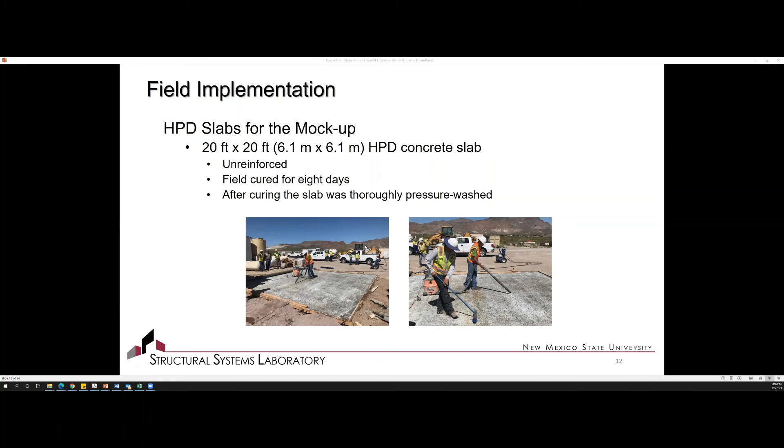Within these slabs we also did a couple of different things. We looked at different surface roughnesses—in some cases we actually left it partially flat. We looked at different types of surface roughness to see the bond strengths we got in this field application. So we were running a bit of an experiment looking at surface preparation as we did the mock-ups with the contractors as well.

We started out planning for just one mock-up. We ended up doing 3, and this comes into some of the challenges we see as we take things from the laboratory into the field.

For the first mock-up, we worked with the contractors there to cast the UHPC. However, we had some issues with that—the moisture content in the sand was not properly accounted for, and a different super plasticizer was used than what was specified. So it actually didn't set for about 7 days with this product. We immediately knew we had to do something else.

For mock-up 2, we reused the mock-up 1 slab, but didn't place the UHPC on that since we knew issues were already there. We had 5 batches of the overlay material placed. Other challenges were associated with the mixers, mixing times, and getting the concrete down quickly. Summer conditions in New Mexico at the time were well above 100 degrees Fahrenheit, so we were dealing with temperature conditions and making sure the concrete was placed cool enough.

So we addressed some of those issues, and then we ended up doing a third mock-up. This one had a slab that was demolished, and we had a new slab constructed for mock-up 3.

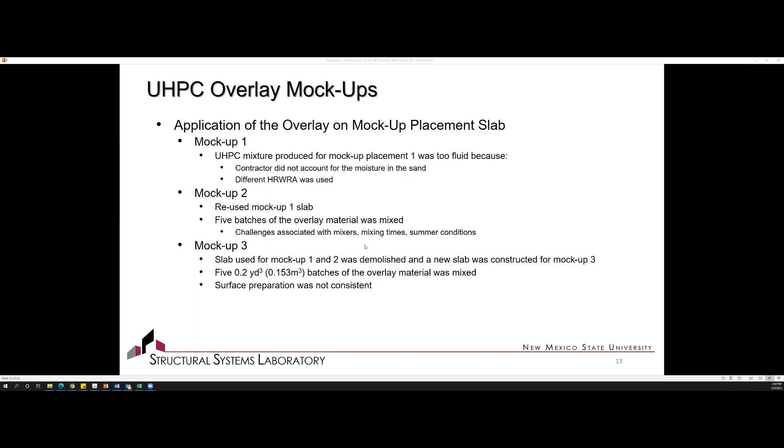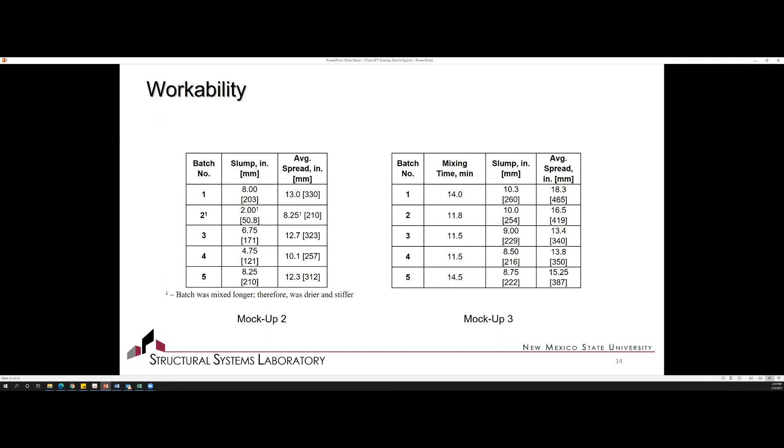After the third, and during these mock-ups, we were always looking at workability. We were looking at slump, spread, mixing times, and so forth, just making sure that we had consistency, getting the training there for the contractors getting used to the material because it is different, looking at how quickly things were placed.

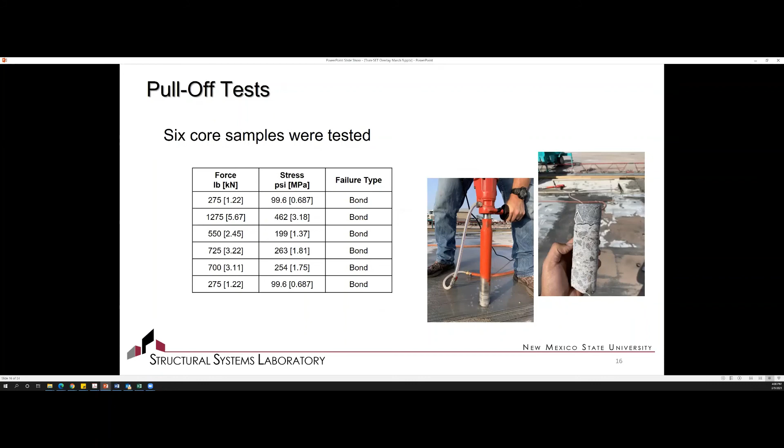We also did the pull-off test. We went out and poured several specimens and did some pull-off samples. We tested this and looked at the bond behavior of that. Some of the cases were a little bit lower than what we wanted to see with the field.

So we went back and did some laboratory tests as well. With the laboratory test, we were able to identify key elements that were causing us issues in the field, so that we could address those issues and work with the contractors and the New Mexico DOT to make sure that we get the bond that we're looking for.

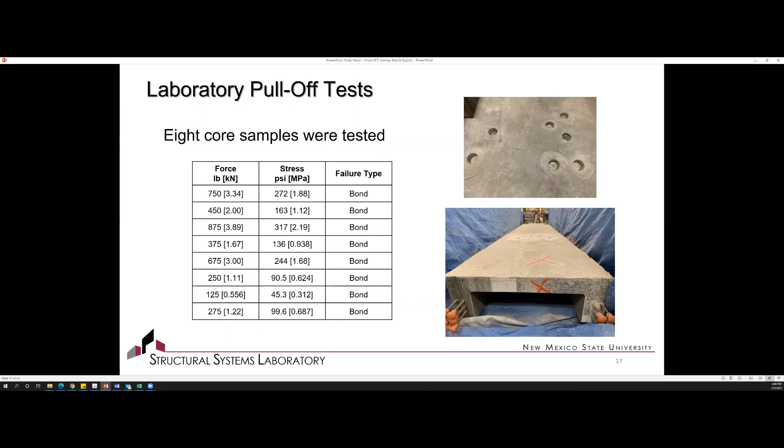These are the girder that had actually been tested, and we did some bond tests there, and we also had some additional specimens that we cast and looked at the bond on those as well. At that point, we felt comfortable that we had addressed a lot of the issues we were concerned with, making sure we were happy moving forward.

Then we started working back on the bridge. We've been placing the sensors on the bridge, so we have strain gauges and thermocouples that we're working on right now. These will be inside the box girders, embedded in the HPD deck, and then embedded in a UHPC overlay as well. We're looking at all these different locations that we're putting this in.

The idea with these was that we wanted to do our best to create a vertical profile. We're trying to align the strain gauges along the cross section, so we get a strain distribution along those three different materials: the existing concrete of the box girders, the HPD concrete that was just cast, and the UHPC overlay, so we could look at the strain profiles in the materials.

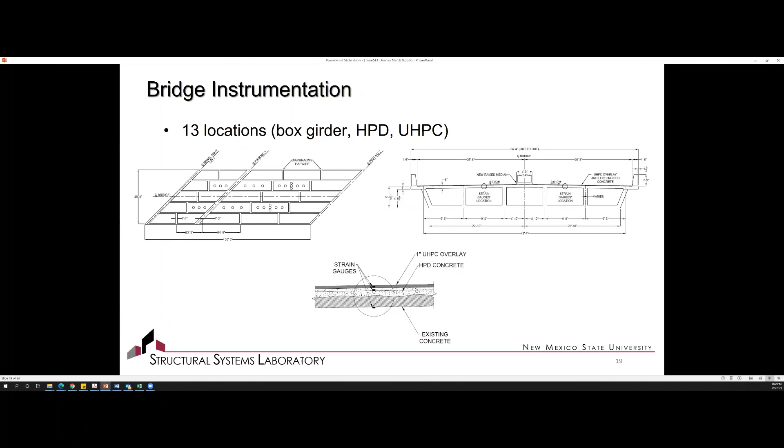We put 2 strain gauges at each location, so we're looking at both transverse and longitudinal behavior. We have the concrete gauges on the interior, and then the steel strain gauges that were embedded into the HPD layer.

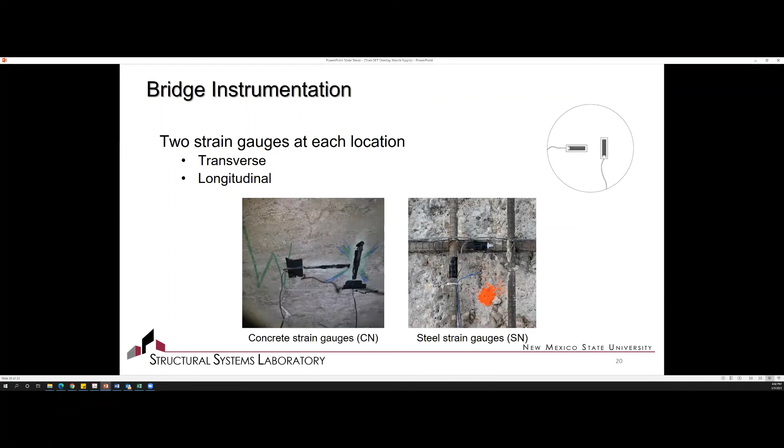So the current status of where this is at. About a week and a half ago, they cast the HPC layer on the second lane. So the deck concrete is now cast. We're currently working with the NMDOT to prepare to put the UHPC overlay on. So that's kind of where the project stands to date.

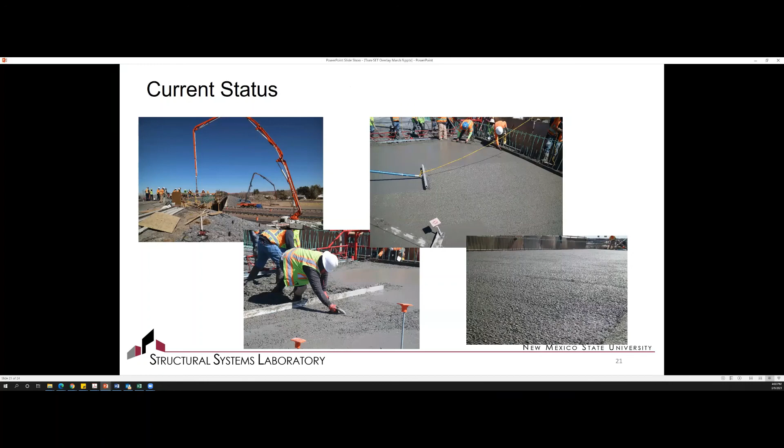These are the students who were out there last week working with the contractors on this, taking measurements. We do have a little bit of data collected. This is just raw data, so don't take it for anything more than data that's been thrown on a graph. Nothing really processed yet. We just took a snapshot.

So just to summarize everything: transferring the UHPC technology to the field resulted in some changes to the mixture proportion. The steel fiber product was something we had to change very early on. So we had some changes to the mixture proportion that did reduce the specified compressive strength. But we were willing to give that up as long as we were able to keep the other properties that we needed for the overlay application.

We also had to go back and make sure we had the surface preparation correctly. We did see some lower bond strengths than we anticipated. We found those key elements that really played a big factor in that, and we've addressed that with NMDOT, working with the contractor to make sure those issues are taken care of.

The mock-ups have been critical, and we found this in both bridge projects I've worked on with the NMDOT implementing UHPC - the mock-ups really do allow for the challenges to be addressed, training for the contractor, because it is a different material. Sometimes they're not used to seeing concrete that's much drier, and people start adding water without really knowing what it's going to do to the mix. So that training is very important.

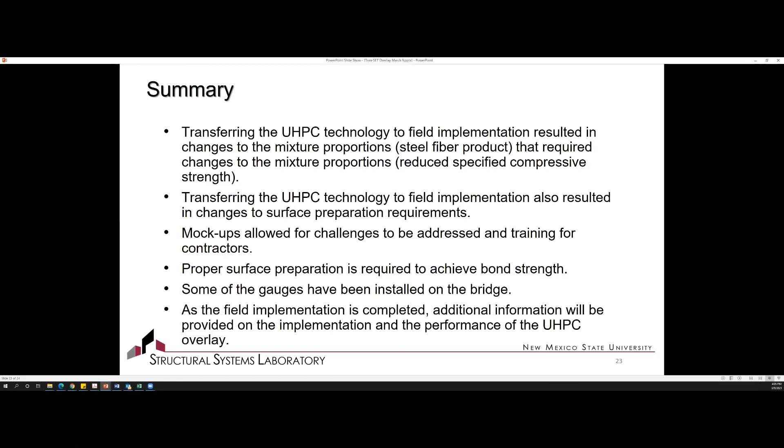And proper surface preparation is going to be required to achieve the bond strength that we're wanting. We've installed some of the gauges on the bridge. Right now we're taking some measurements, and as the implementation continues we'll keep collecting data, and additional information will be provided on the implementation and performance of the UHPC overlay as it gets placed.

So I just want to acknowledge the NMDOT for the sponsorship of this project, as well as Tran-SET. And yeah, that's kind of an update on what we've been up to.